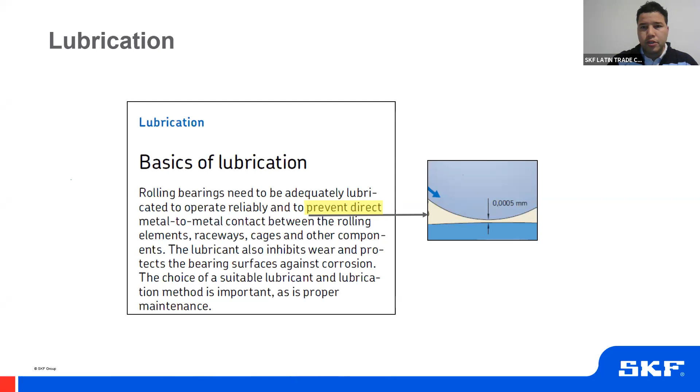But now take a look at what is affecting my bearing and why do I need to put lubricant on it. If we're talking about factors, let's start with the load.

If we have 2 industrial fans, even if you have the same machine, same bearing sizes, and the same motor horsepower, they could be working on different types of loads, if they are pushing hot air or they are pushing cool air. So the loads might be different, and the thermal behavior of this equipment will be different as well.

Let's talk about the speed. It's not the same to have a motor running 1800 RPMs or having a motor pushing air at 3600 RPM. Got my point?

Environment is critical because industrial fans could be on a facility that is mostly clean, like a food and beverage plant. But it's not the same if we have this fan located in a mine, a quarry, a cement plant. The pollution in the environment will be hard and aggressive, and will affect directly the life of my lubricant and the life expectancy of the bearing.

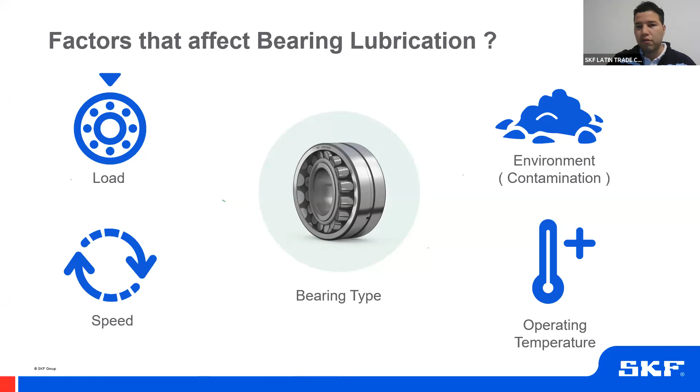But let's take a look. If you have a pump or a stone crusher with the same type of bearings that the fan is using, the loads and performance of those bearings will be totally different, because the behaviors are specific for every one of these types of equipment. At the end, all this affects how the machine runs. It's just a rotor, it's just a motor, but the loads are totally different.

And you need to look, when you analyze a situation on this type of equipment, at the complete scenario. If you're going to analyze why a bearing is having special conditions in a fan, don't look only at the fan. You need to analyze the motor, the structure, the process parameters, the lubrication, etc.

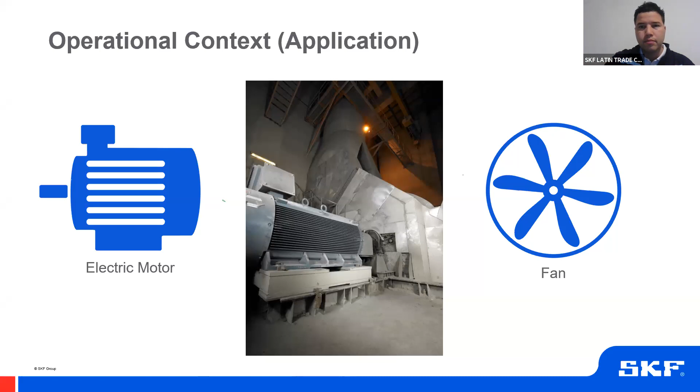But what is a fan? It's a simple question, but the fan is nothing more than a machine that provides speed and pressure to a gas—in this case could be air, hot gas, I don't know. It's a fluid that, when it passes through the rotor on the fan, gains speed and pressure.

Normally what is created on the bearings are the reactions from trying to push this air, because a fan needs to work against the atmospheric pressure and all the resistance that the piping can cause. So these loads that are created on the rotor are transferred directly to the bearings.

But what type of loads are we having on those bearings? We've got two types of loads, radial load and axial load. The radial load is generated by the own weight of the assembly—the rotor, the shaft, and some other components—that are supported on the two bearings.

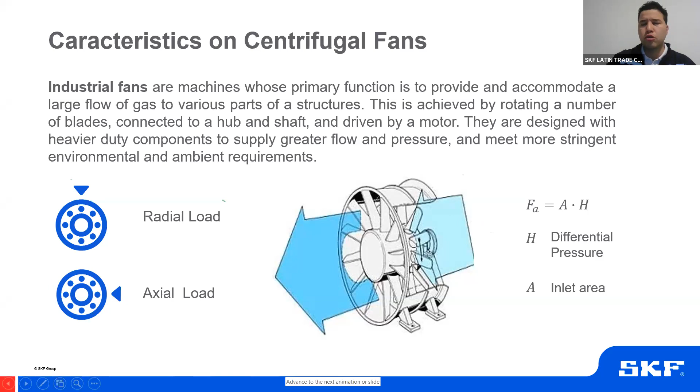But what type of fans do we have? Who regulates the construction of those fans? The AMCA is the association that normally controls the design of centrifugal fans. According to standard 99-2404-03, we have different types of fan configuration or arrangement that, based on the type of industry, you must select one or another.

But what is important for us is that, based on that arrangement, our bearings will have different types of performance, and we need to take control of this. We need to understand what to expect in order to properly address actions that will help extend the lifetime of these bearings.

You can see, for example—I'll use the pointer again—this type of arrangement here, where the rotors are overhung, with one input and one output. Notice we have two bearings here, and each of those bearings will support different types of loads. In the second arrangement, we again have one in, one output, but in this case the rotor is not overhung—the rotor is between bearings.

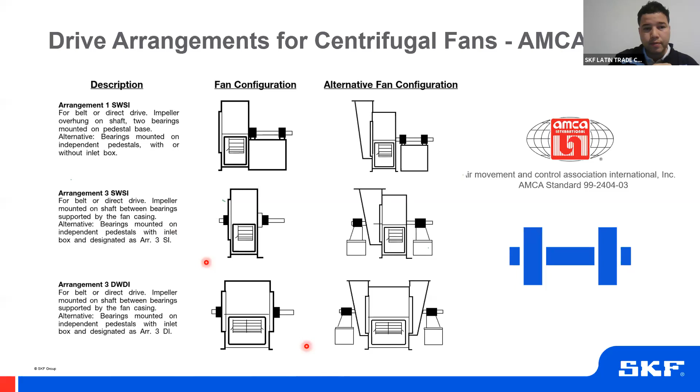Just thinking about this, you can understand now that this one here will need different features that, when both combined, my fan runs properly.

Let's go to this picture right now. This one has one input, one output, but now is in between bearings. So the load is divided this way. We are assuming that this side of the image is the driven equipment, and this side the driving equipment. We have axial load and radial load in this bearing, and only radial load in this bearing.

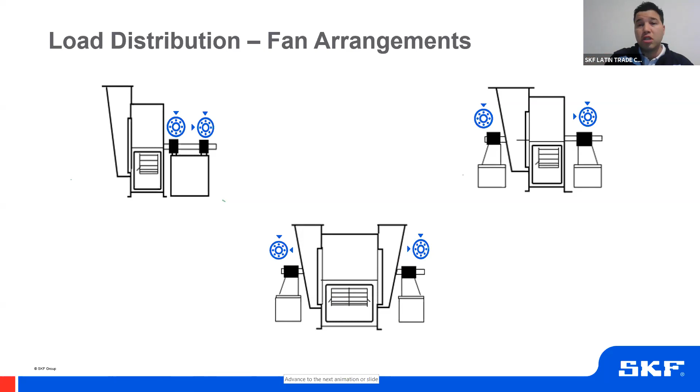Moving forward, we would like to know what happens to my bearings when they are wearing out, and what people do when they start sensing those symptoms. So here we have some symptoms on centrifugal fan bearings while they are in operation. We could have, because of normal operation, temperature increase or vibration and noise increase as well. Sometimes they just increase in a big amount. But then, why is the reason this happened?

Temperature increase is something that happens because of the friction inside of the housing. But then what people do on the facility is that they start using some ways to keep the bearing cool, using air pressure, or sometimes putting a water hose on the housing, to keep the bearing cool.

In the other hand, hold on a second. Okay, got you. Just text me that you are seeing it now. I am using the pointer. Well, I am using the pointer very little, so it doesn't matter really, but I'll try to explain more myself about what I'm doing here.

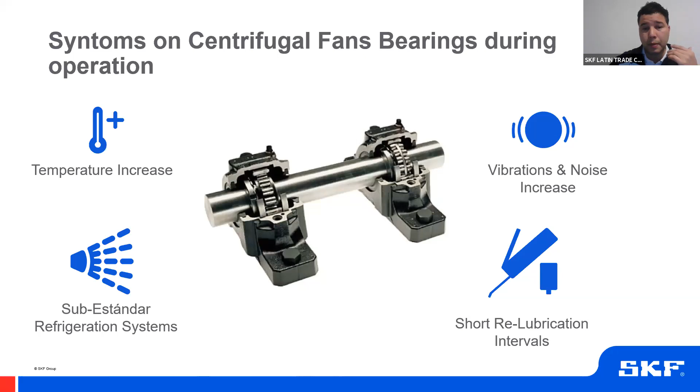You only learn how to live with a chronic problem. Oh, the bearing is hot, put some air, leave it like that. Oh, the bearing is making noise, put some lubricant, leave it like that. So you learn how to live with a chronic problem, and that's not good, right? Let's take an example of what I'm talking about. I hope you don't have this type of situation on your facility.

And that's not good. It is important to have all the information of your fan, your performance charts, your operating conditions, in order to understand how the fans operate and what to expect when doing changes. Some fans might run normal speed, other fans might run variable speed. But if we don't have that information, we will be blind all the time trying to identify the root cause of a problem.

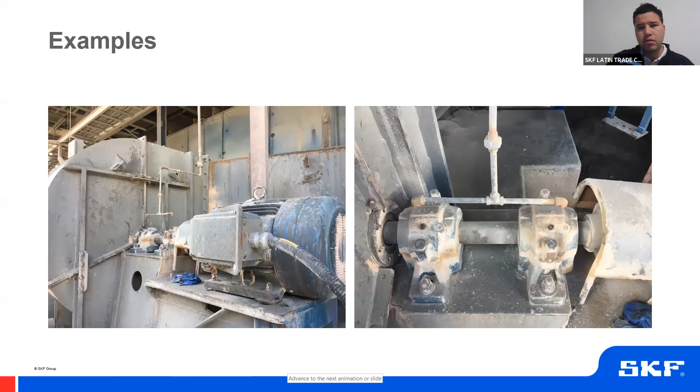So what should we use for lubricating a fan? Grease or oil? The OEM might tell you what to do, but if you don't have that, you really need to use a lubricant selection flow chart or criteria to help you select the best lubricant and lubrication system for your fan. We're not going into detail to explain this. This is part of the rolling bearing catalog of SKF, so you can download it anytime, use it if you need assistance, or contact us back.

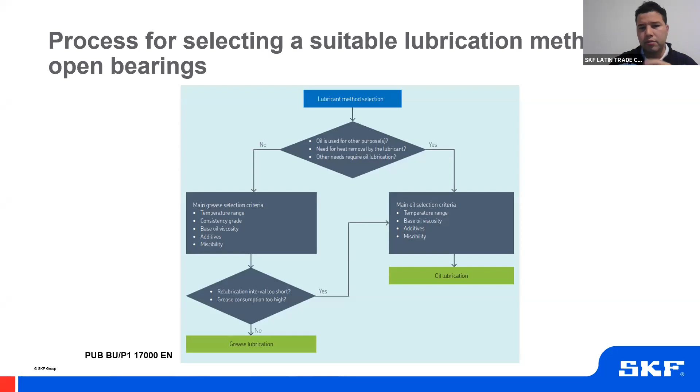But moving forward, let's look at why we choose grease or oil when selecting a lubrication system. Grease, the main reasons to choose it, is cost effectiveness and simplicity. Grease is easily retained in the bearing and housing, thus requiring less complicated sealing arrangements compared with oil lubrication.

The main exception for choosing grease is in applications where operating conditions require a grease relubrication interval that is unacceptable or too short, or where lubricating oil must be used for other purposes, like in gearboxes. Another reason could be needing heat removal capability, in which case oil will be the best choice, or purging and removing used grease becomes expensive to handle. So there are many factors, but mostly 80% of all bearings are grease lubricated.

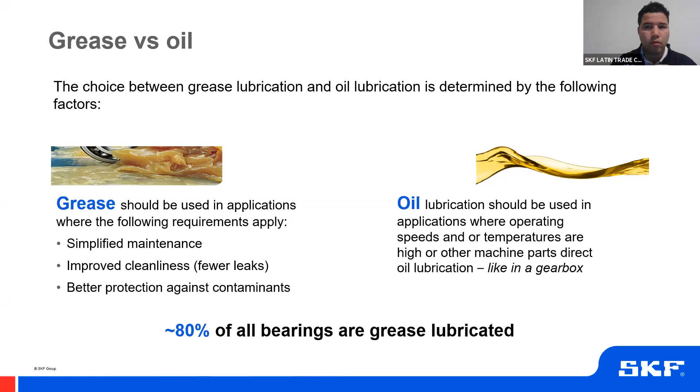Why oil? What is grease? Just a basic explanation. Oil is a base oil plus additives that attack specific aspects of the situation, like avoiding corrosion or keeping water outside, so the oil behaves as it's supposed to, and others. In the case of grease, it's a base oil with other additives as well, but also a thickener. This thickener is what gives different operating temperature ranges, or, according to the NLGI classification, different grease consistency or hardness. So basically, this is the difference between grease and oil.

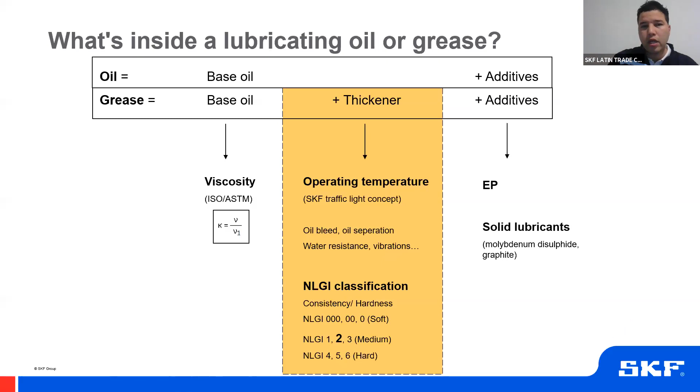But now, going back to the fans, we already know about greases and oils. Let's talk about how we analyze our fans. Say I have this problem on my facility, I need to do a condition analysis of the bearings while in operation. How to do that? Well, first you need to analyze your fan like a static machine. You need to do a free body diagram, and understand how the loads are divided between the supports, while also being aware that your fan could run at variable speed.

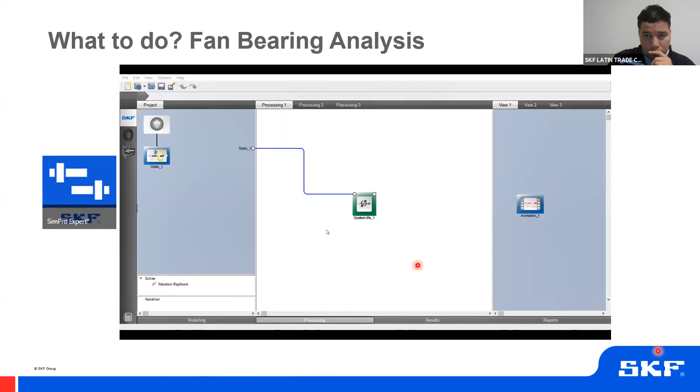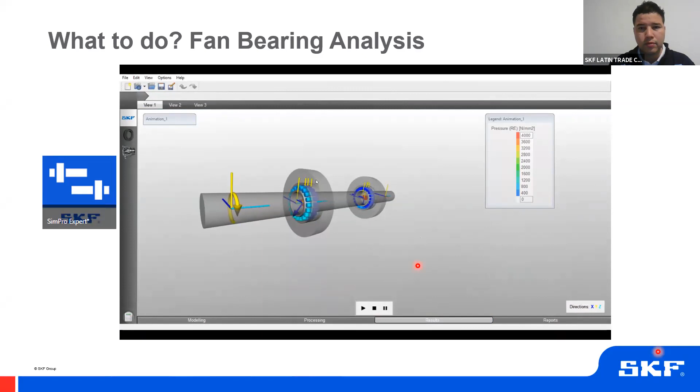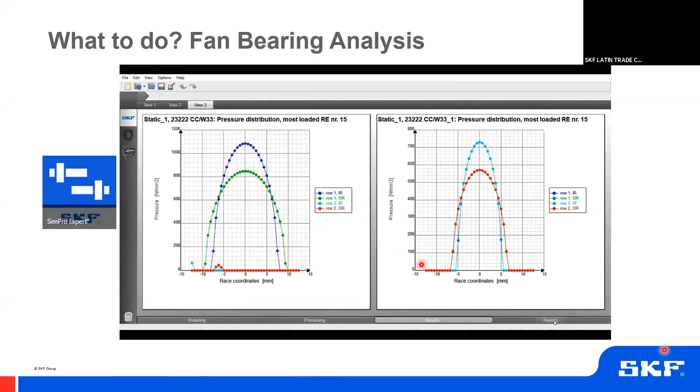Jose, is it okay? It was okay, the video. Did you guys hear the speech? Lily, Jose? Hi, Jose, okay, you have audio. Okay, okay, perfect, I have audio now, right now.

Good morning everyone. This application for analyzing the different variables of the bearing is to make this process very easy, because if you don't have this type of tool, it's necessary to do that analysis manually. The different variables of the machine, in this case a fan, it's necessary to know previously, to introduce that information in the tool.

So to get the result, we analyze what is the different load ratio, temperature, related to the delta pressure.

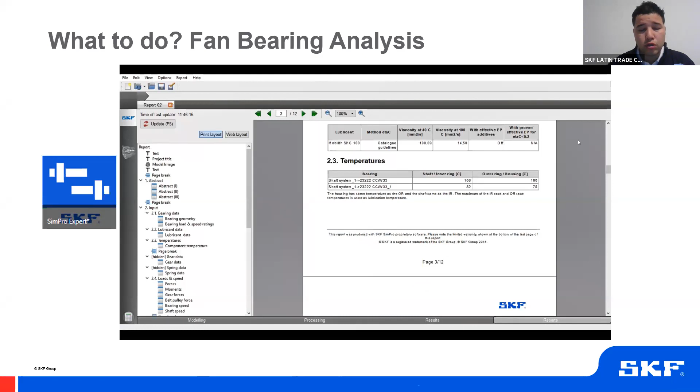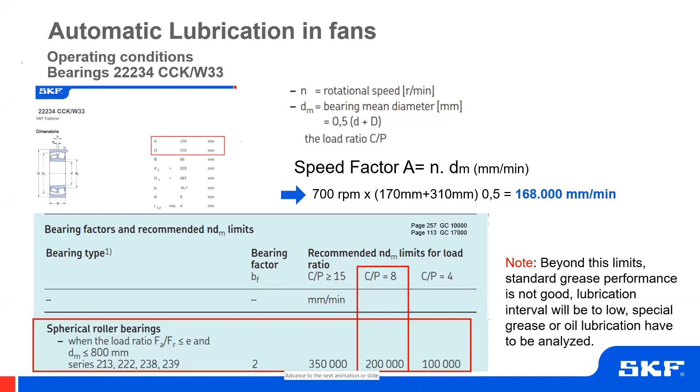You then know what is the recommended limit for your bearing and take the decision to use grease or oil. When this factor is above the general recommendation in the table for spherical roller bearings, in this case, you know that you can use grease. Look at the note: beyond this limit, standard grease performance is not good.

So, for that bearing, notice the speed in this case is medium. This criteria is used for the selection of the suitable grease for this type of bearing with different variables.

LGWA2 is typically used, but it's not the only main criteria. The criteria are to check different conditions and temperature to use that lubricant for your fans.

This is another tool, the SKF DialSet, used to know the quantity and interval for re-lubrication. With different conditions, the tool recommends certain greases. In this case, select or choose the LGWA with the different condition at the bearing operating temperature, and the result is here.

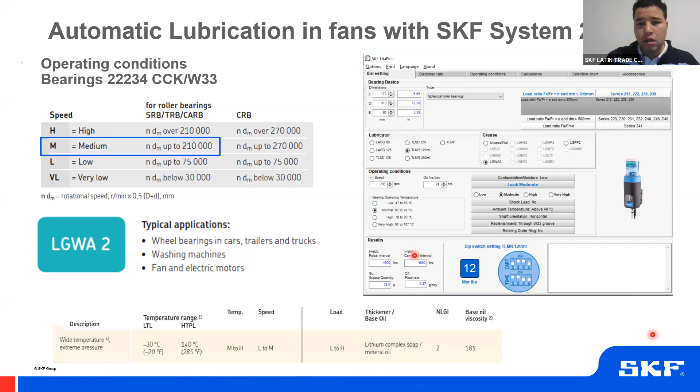We are entering now the last part of this webinar, and I would like to point out condition monitoring, where finally, using different types of techniques, you can control and evaluate the behavior of your assets - fan, motor, pumps, compressor, etc. In this case, fans. The idea is that you use changes in the performance of these bearings to evaluate and make decisions.

If you have lubrication problems, normally at the beginning of the presentation, I said that vibration will change noise and also temperature. Using a temperature gun, you can control how fast the temperature is changing on your bearings. But also if you have equipment that allows you to monitor vibrations, not only for the entire machinery, but let's say for the bearing specifically, you can trend how it's doing. If it's going slowly, if it's going too fast, what then is the root cause of this problem?

So at the end of the day, what I'm trying to say is that you need to implement in your maintenance strategy some type of vibration monitoring, temperature monitoring, ultrasound monitoring systems in order to control the performance of your assets. Fans are very critical components on a facility, and one thing I know for sure is that when they are down, they are not down for just one hour. You have to get the whole rotor out, disassemble the casing, and all this kind of things, and it's kind of messy. So better you control and take actions in time before you have an unplanned shutdown.

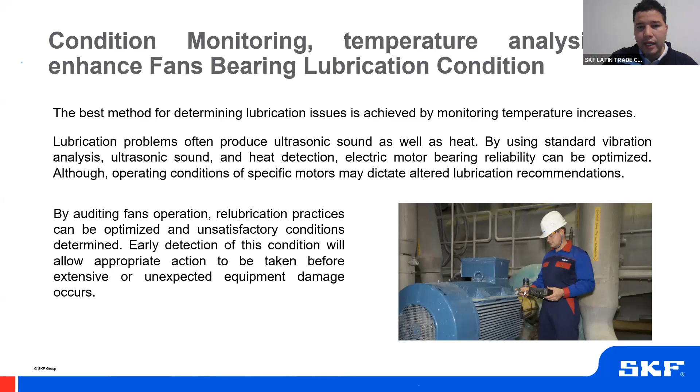And just to finalize, let's read some conclusions about what was presented here. Allow me to read it. The analysis of a failure event in bearings of any rotating equipment must be approached from the perspective of the total asset, the complete asset. Provision of design of standard centrifugal fans obey the AMCA standard 99-2404-03. The loads on the bearings in a centrifugal fan depend on the final fan arrangement.

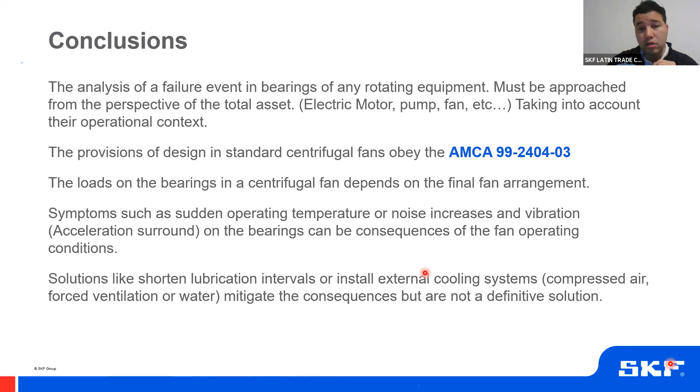Symptoms such as sudden operating temperature or noise increase and vibration on the bearings can be consequences of the fan operating conditions. Solutions like shortening lubrication intervals or installing an external cooling system like compressed air or water mitigate the consequence, but are not a definitive solution. Last one, running an analysis of the operating conditions in a fan is the best solution, with the objective of finding the root cause of the symptom generated by the operating condition of the fan. This type of analysis allows you to select the adequate lubricant system for the fan bearings based on the operating conditions of the assets.